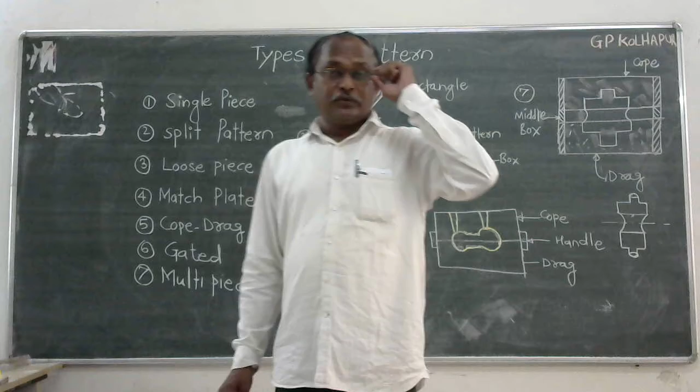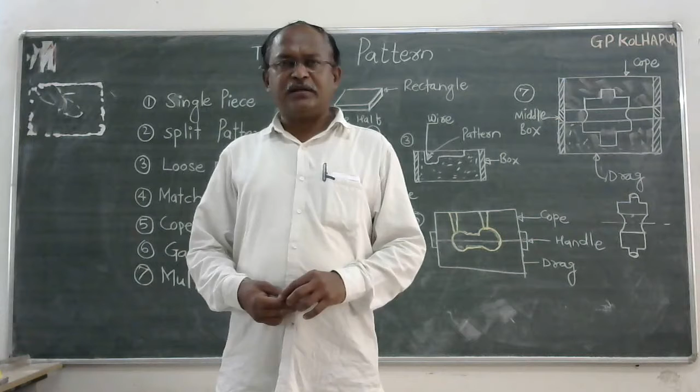In last lecture, we had seen pattern making, that is what types of materials to be used for making pattern, and we had also seen the basic procedure for pattern making, molding, and casting processes. And we have also studied about the pattern making, molding, and casting, how you are going to cast a member.

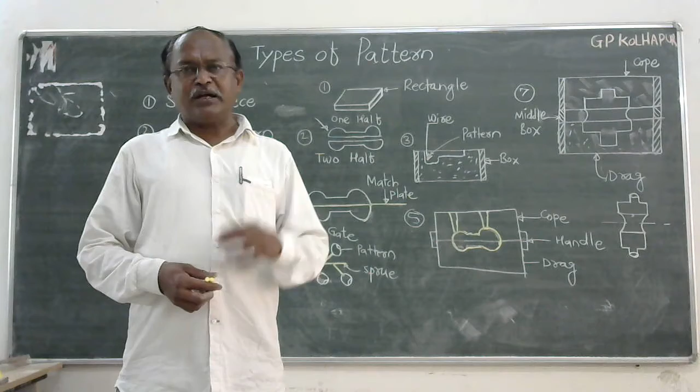So, in today's lecture, we are going to discuss about types of pattern. What are the different types of patterns to be used in foundries, foundry shop or in factory. So after studying these types of patterns, you are able to understand the different types of patterns, how they are going to be manufactured and for what purpose they are going to be prepared. So let us start with various types of patterns.

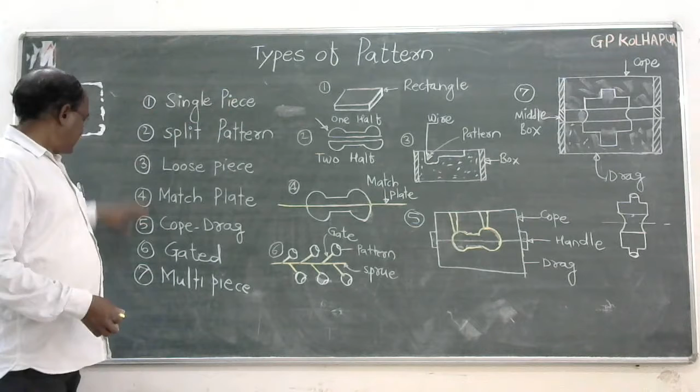So if you look into the types of pattern, then there are around 7 types of patterns. First one is single piece pattern or solid pattern. It is also called a solid pattern because it is made in a single piece. Only a single piece is there. So if I take this example, this is the rectangular plate. So this is a single plate. That's why it is a single piece pattern.

Suppose I want to cast a number of rectangular plates made up of aluminium. So previously you prepare a pattern from wood material, then you cast it and produce a number of aluminium plates that are rectangular in nature. So that is the single piece or solid pattern.

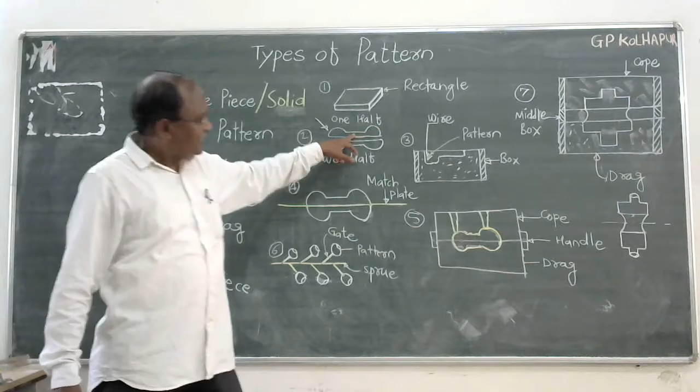Split pattern: in last lecture we had seen the split patterns. This is the dumbbell. The pattern is divided into two halves. One pattern is in the cope box, another pattern is in the drag box. And ultimately the cavity is created and that is filled up with the molten metal. That is the casting process. So this pattern is split up, or this is also called the two-piece pattern. It is made up of wood.

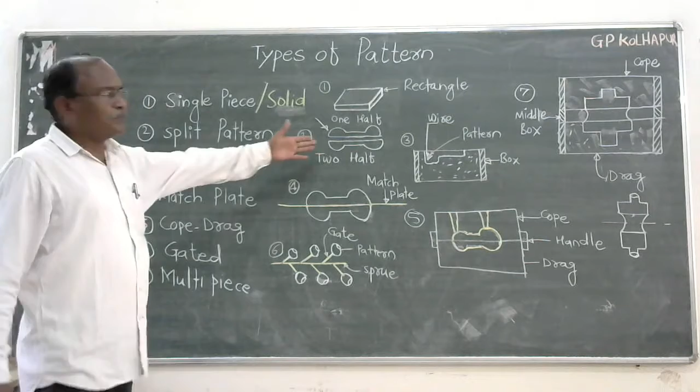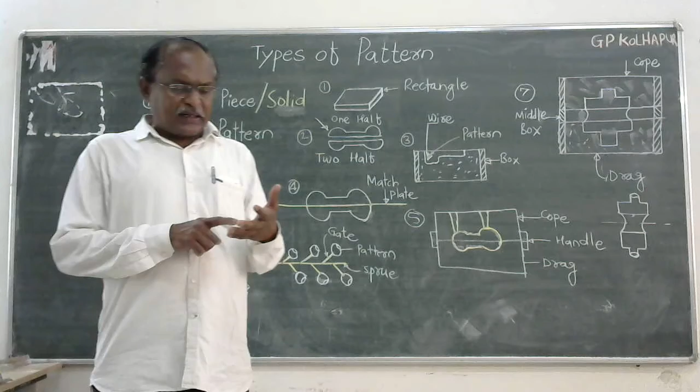Mostly, 80% of patterns are made up of wood because it is a cheap material from an economical point of view, it is easily available, it is low in weight, and you can easily give various shapes to the wood material. So a split pattern means it is split into parts. That's why it is a split pattern.

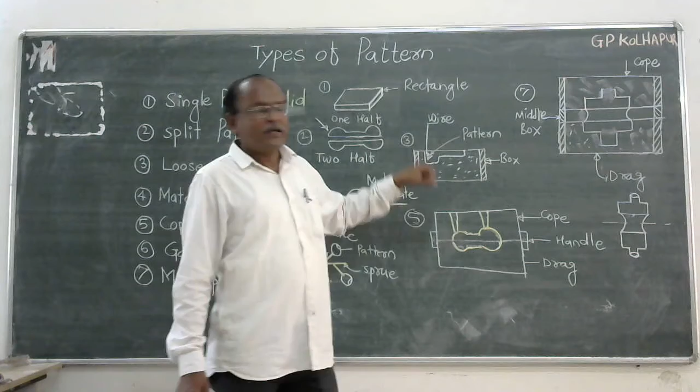Loose piece patterns. In some cases, while molding or casting, you require some loose piece of pattern. That loose piece is held by means of some wire or some rod. That's why it is the loose piece pattern. Match plate pattern is very similar to split pattern, but there is a match plate in between these two patterns. That's why it is a match plate pattern.

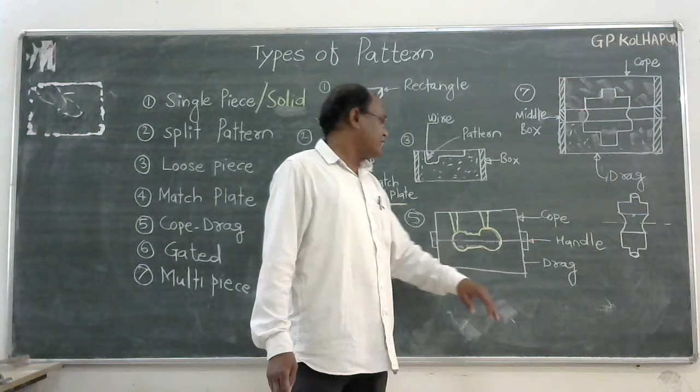Cope and drag pattern. One half of the pattern is in the box that is called the cope. Another half of the pattern is in the drag box. That's why this pattern is called the cope and drag pattern.

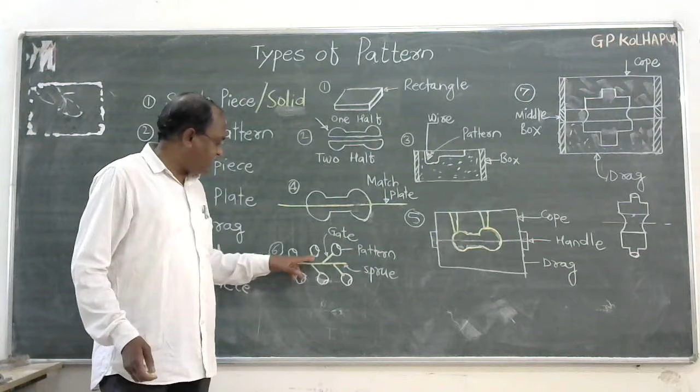Gated pattern. If you are going to produce a large quantity of parts, you go for the gated pattern. Gated pattern means this is the sprue, these are the various gates, and these are the patterns. Those are soldered here, so a number of patterns are soldered on the gate. How many parts are you going to cast? 1, 2, 3, 4, 5, 6. At a time, you are going to cast 6 parts.

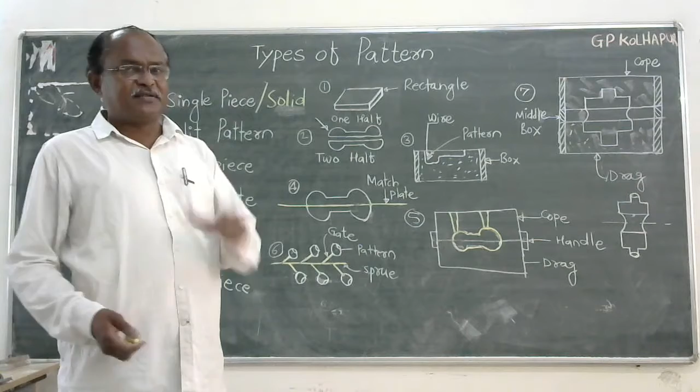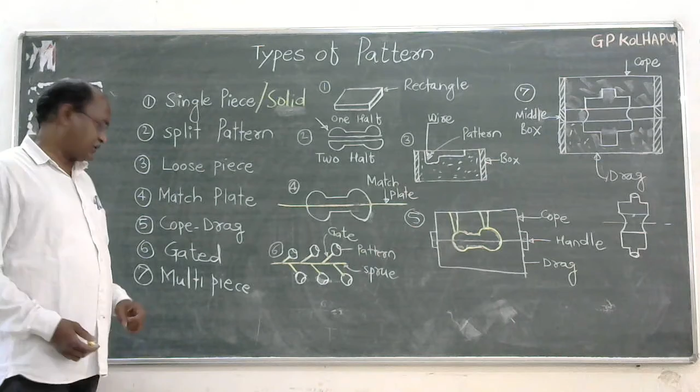So 6 patterns are required, and you develop a cavity in the box, fill it up with the molten metal, and manufacture the cast product. So multi-piece pattern. If I look at this diagram, multi-piece pattern means more than 2 patterns. Here, one pattern is in the cope box, another pattern is in the drag box. This portion is in the drag, the upper portion is in the cope, and in the middle box there is this type of pattern. So if I draw this, then this portion is like this.

This is one middle portion, another pattern that is in the cope box. Another is in the drag box. So this pattern is like this. And some holes or pins are there so that both are assembled together.

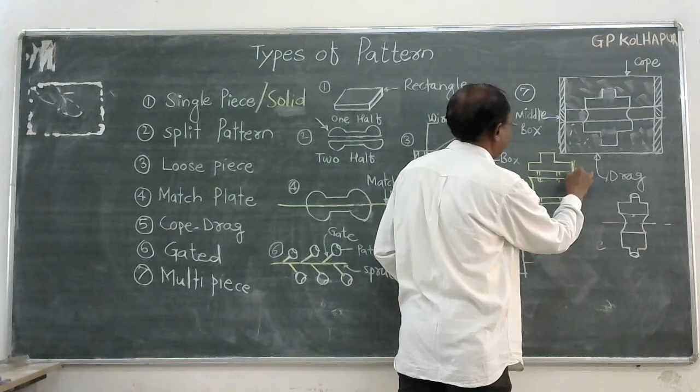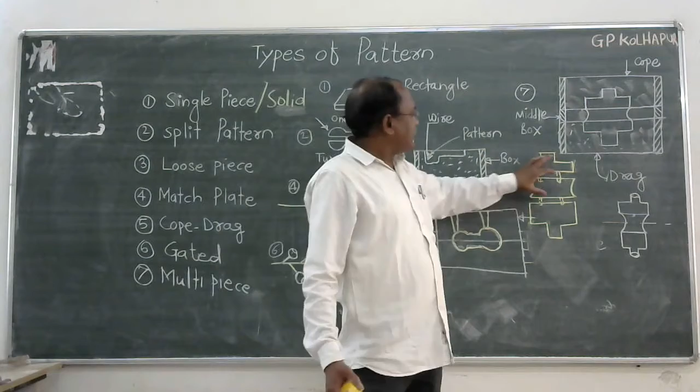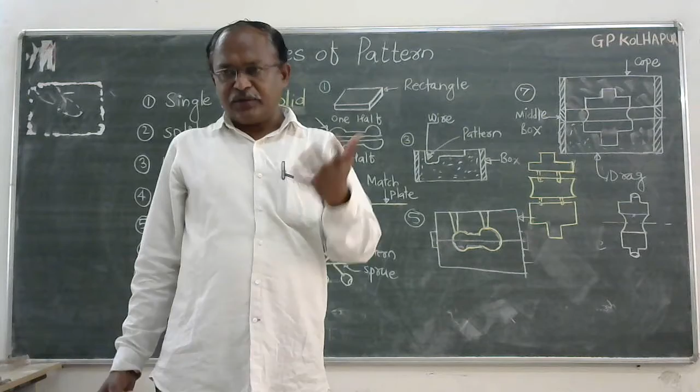That's why it is more than two patterns. One pattern is in the cope box, another pattern is in the drag, and one pattern is in the middle box. So the number of patterns is more than two. That's why it is called multi-piece patterns. So all these patterns are made up of wood material because wood is easily available, cheap, low in weight, and you can easily give variation to the wood material.

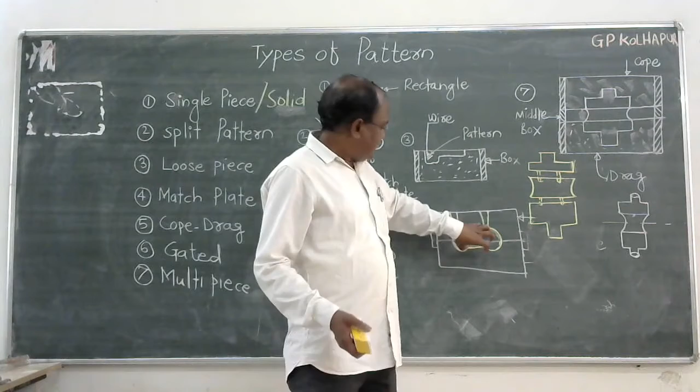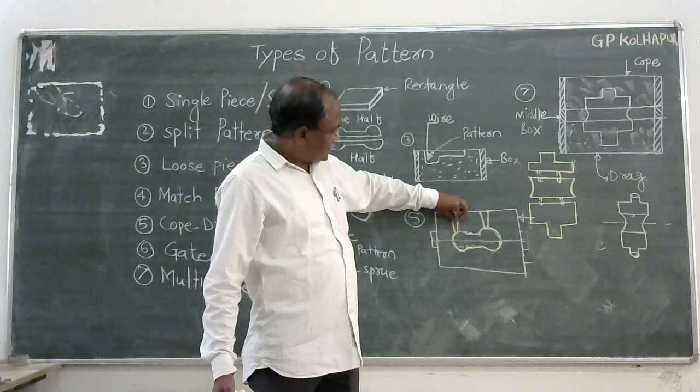That's why all the patterns are previously made of wood, placed in the box, fill the sand around the pattern, remove the patterns, runner, riser, and this type of cavity is created. Then take the molten metal, pour it through the runner, it fills all the cavities and rises to the riser, and after solidification and after removing the cope and drag and destroying the sand box, you will have this cast product. So this is all about various types of pattern.

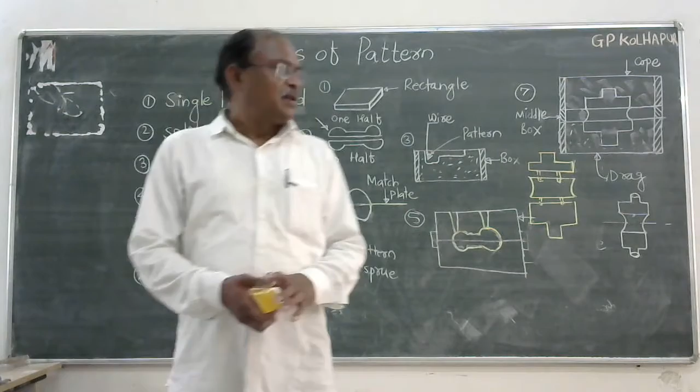Okay. So in the next video, we are going to discuss what are the pattern allowances.